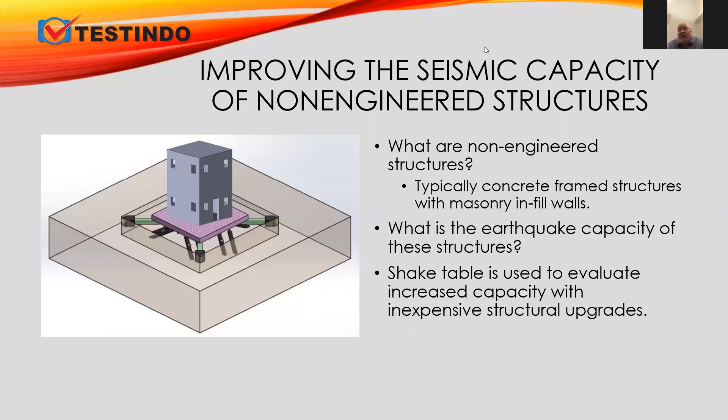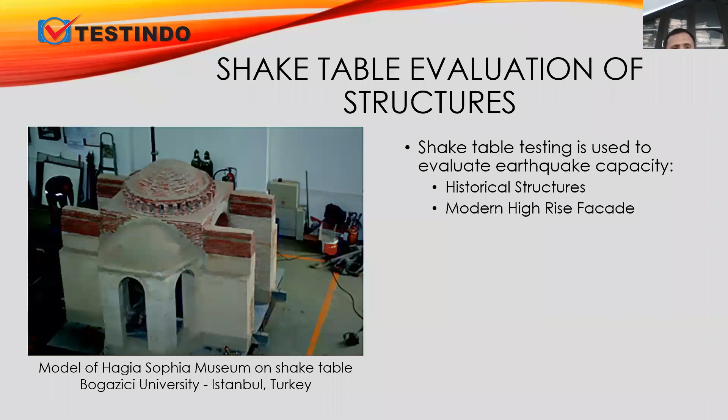Very often people will analyze foundations in these soil boxes. The shake table will shake the soil box. The soil box will have soil in it, but with a model of a foundation. This could be a machine foundation, for example, a turbine, or any other kind of structure. And it is possible to measure how the structure responds inside the soil, inside the box, and therefore do a complex soil structure interaction analysis.

The reason there are two boxes is that the less expensive boxes are the rigid wall boxes, in which there is just a steel or aluminum box where the soil is placed. But this can introduce some inaccuracies because the soil box is not infinite. When you have a foundation, there's a great amount of soil around it. And so when the foundation radiates energy, the energy travels away and never comes back to the foundation. But in the soil box, the energy can bounce off the walls of the soil box and come back and affect the answer.

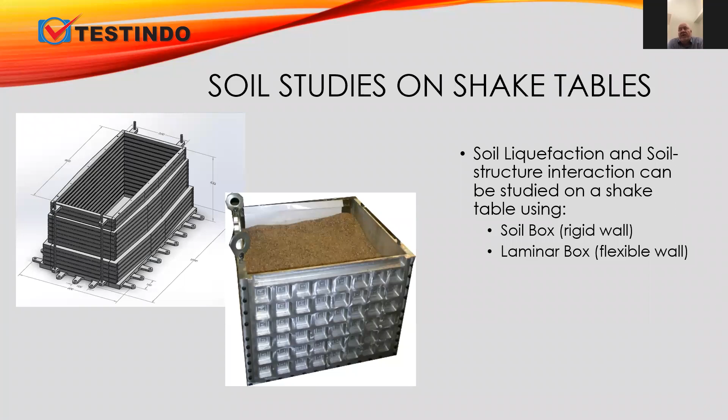Again, it would take too long to describe tests on all these structures. But for example, a very important testing program that is going on in the United States and in other countries is the ability of mechanical equipment in critical buildings to survive an earthquake. People are very concerned about the equipment inside police stations, fire stations, and hospitals, because after a large earthquake, it is very important that the services of the police, the fire department, and doctors continue. And so it is not acceptable that these buildings will stay up, but the equipment inside would fail.

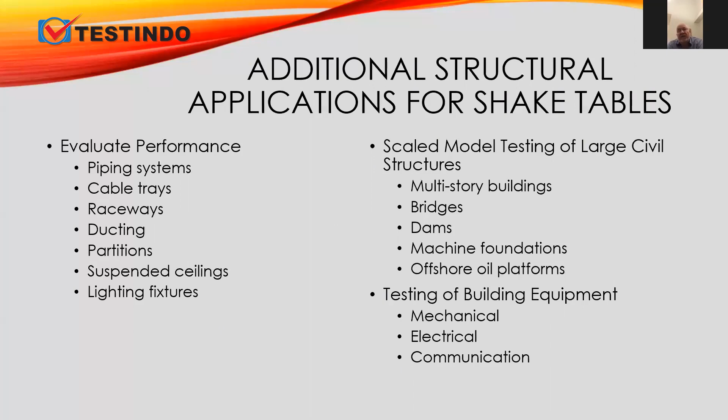The stroke is plus or minus 10 centimeters. It is driven with a servo hydraulic actuator. And the table surface is 1.5 meters square and can provide a 1.5 G capacity with a 3-ton payload on the table. So this is a table I'm particularly proud of, as I traveled to Indonesia in 2016 to install this table.

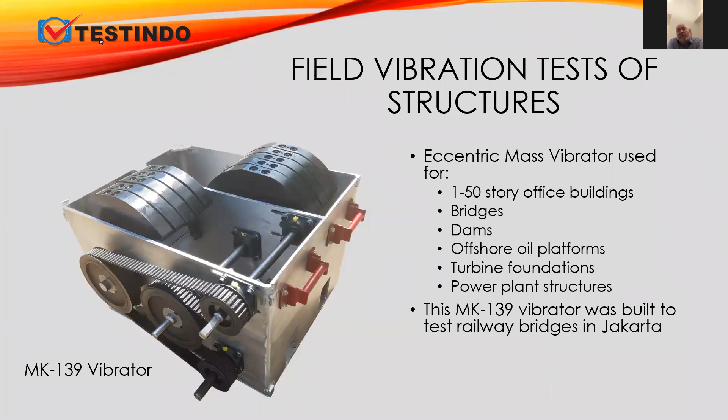This is something which might be much more familiar to you than shake tables or eccentric mass vibrators. But they are also a useful way of solving some problems, such as the failure of panels and beams, by testing them statically or dynamically with hydraulic actuators attached to these kinds of reaction frames. In particular, I am thinking of one project that was done at Drexel University in the United States, where it was a desire to accurately model the vertical and horizontal capacity of a masonry wall.

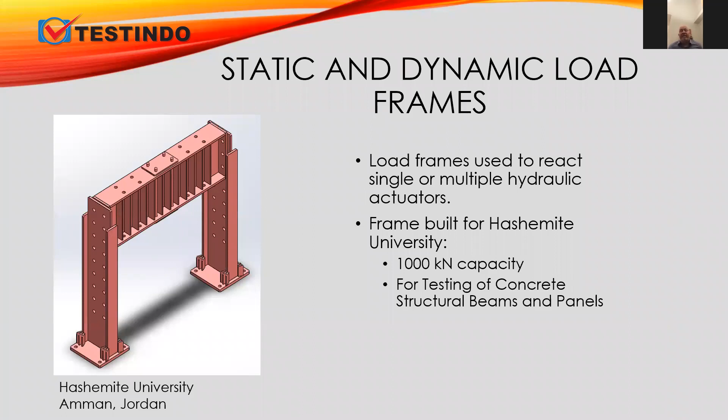Right. You know, there is always the problem that sometimes structures are too big or too expensive to do testing. And so, especially in soil dynamic studies, people would like to do scale model testing of structures in soil. And sometimes the scale factor is a factor of 100 or more. And so it's necessary to do analysis and understand how the performance of a model 100 times smaller than the real structure compares to the real structure.

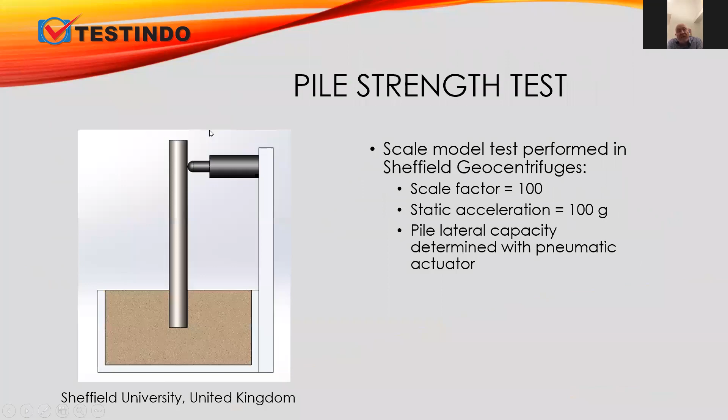Slightly related question, could you tell us how to scale a structure that will be tested on a shake table? What is the experimental method and its relationship to geometry scale, the strength scale, etc.? Well, our third from the last slide shows what some of these scaling parameters are. Again, there are different kinds of scaling, but the most popular one is this velocity scaling. And as it says in the slide, you have a scaling factor S.

So if S is 100, it means that the model is 100 times smaller than the real object. Okay, so in this application, you build your model 100 times smaller. But because of the scaling laws, time changes by a factor of 100 if you use the same material as the real structure. So the resonant frequencies of the model structure will be 100 times larger than the real structure.

Then if you want to excite it on the shake table, in order to get the same strain in the structure, you have to shake it 100 times the acceleration. And so if you have a small model, you're going to have a shake table that can go to much higher frequencies than normal, perhaps 300 hertz. You also need a shake table that can go to much higher acceleration, perhaps 50 Gs. And then you can excite the model and get the same strain in the model as the real structure, so that if that strain is going to break the real structure, you will also break the model structure.